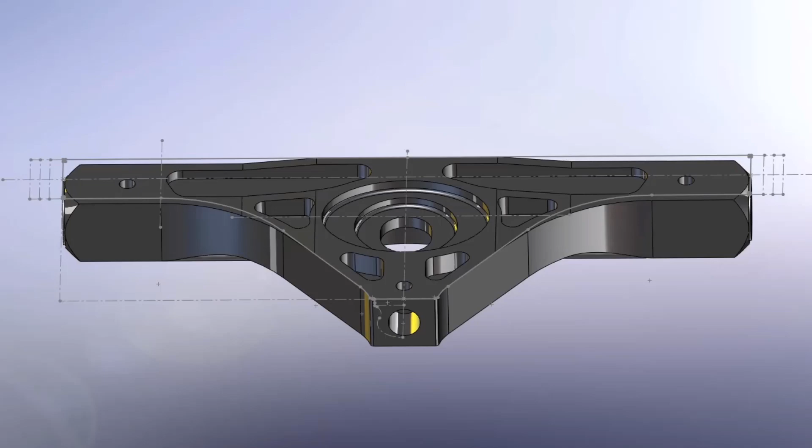Going to be going over today how to utilize the machining extension inside of Fusion 360 to program parts faster, to get rid of things like quality control issues, and overall, hopefully just make sure you guys can end up making more money. Cool, so let's go ahead and jump right into Fusion 360.

So out of the get-go, as you can see here, I have my part set up. This was one I more recently worked with a customer on. It's a weldment. It's a link to like an excavator arm or a trash arm or things like that. And one of the things the customer wanted to do was kind of use one work offset to control everything, but they wanted to be able to actually go in and find both ends of this part on its own corresponding work offset for machining purposes.

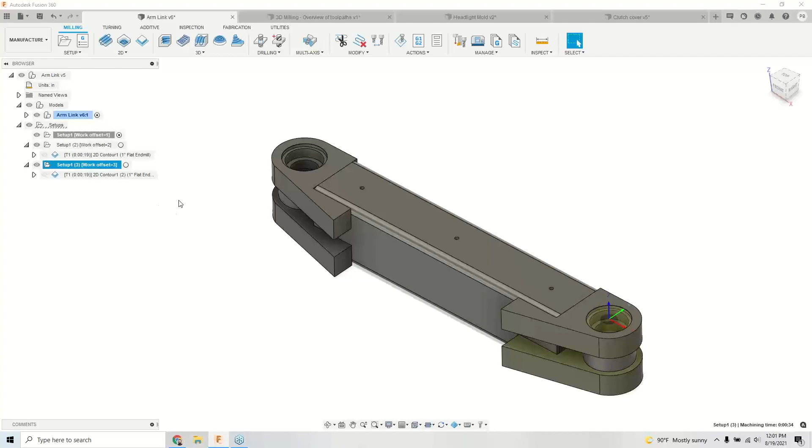And then at the end of that, they want to be able to actually probe their parts, make their measurements, and adjust tool wear on the fly. So as you can see from the get-go, for those of you that have used Fusion, I've already created my couple of work offsets. I've also incorporated in here a contour for that cleanup pass. And inside both of those contours, I need to move a menu here.

I actually created a tool path using wear compensation type. This is the key element here where I can actually go in, use the controller wear, which is where my probe is going to go in and actually push those coordinates. So right out of the get-go, in my first operation, I would like to create a couple of probing cycles to be able to actually probe the inside of those bores.

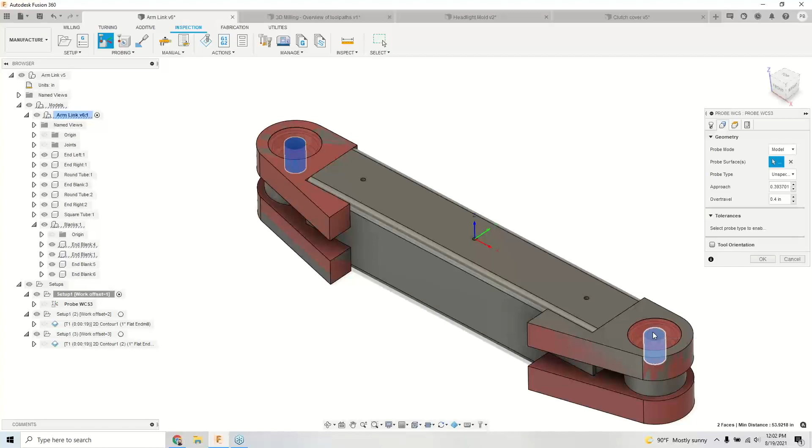So as you're seeing me do, I have these nice blanks cut that would be part of my weldment. Maybe they're water jet, maybe they're laser cut, maybe they're just flame cut. But I want to go in and probe the center of one of those using my probing tool. In this case, give me a quick second to grab my probe. So all I'm doing here is a standard WCS. However, what I want to do is actually output my offset to work offset 2, which will actually be my G55. And that G55 corresponds over here on the left to my next work offset.

So with that being said, I can actually control things. So let's say this was welded together wrong. If it's out of position, or if it's the wrong size from square one, let's just stop the machine and notify what's going on. So this is a process that you'll find yourself doing in the first setup. And the concept here is we're going to use our G54 to set the distance for our probe, and then we're going to push the results for the probe out to G55.

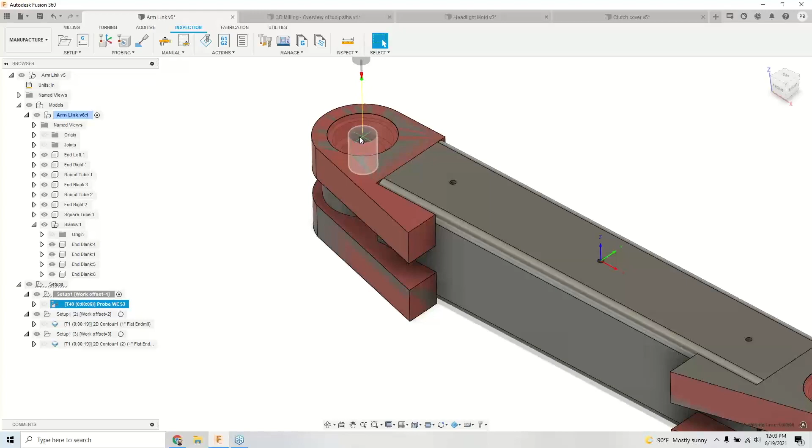I can duplicate this and do this for the other end, but I'm going to go ahead and now rotate down into my next setup. So the advanced probing side of the machining extension as a whole is going to actually include what's called probe geometry versus probe WCS. Probe WCS is in the base package, but probe geometry is where we actually go in and start to create our measurements. So by saying probe geometry, you're going to see this is going to feel very familiar, as if it is that other tool path at the end of the day.

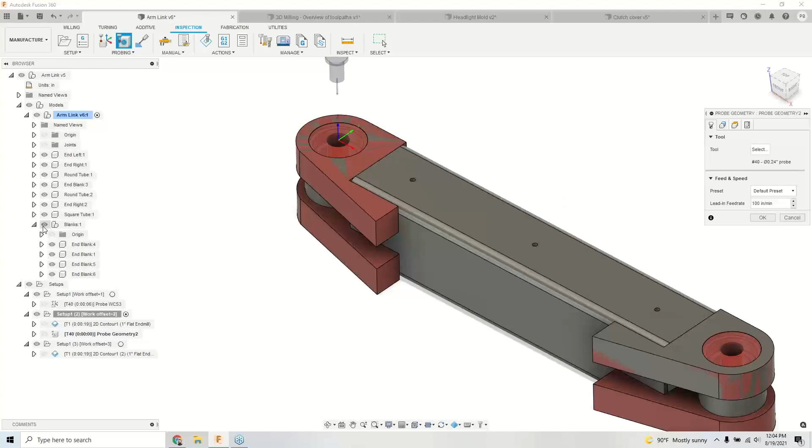So let's say we've already roughed out our pocket and everything. I need to go in and measure where my bearing race is going to fit. And I want to be able to measure that and maintain a tolerance. So let's say my press fit tolerance is going to be plus or minus 5/10. I can go ahead and plug that dimension in here. And with that information, every time it goes in and probes, I may want to say if it's the wrong size, I can go ahead and stop completely. Maybe that tool breaks, or I want to update tool wear based on that actual 2D contour.

So now you can see it actually pulled my tool through, and I can give this a minimum threshold. So we can get really, really precise here, where every 2.5 it's going to update the tool wear, but not until that threshold is met. And you can change your error correction. Maybe it's 100%, maybe it's 50%. This is how we're going to start to automate our process at the end of the day with our probing cycles. So now when we start to run this part, I need to move my menu again here real quick.

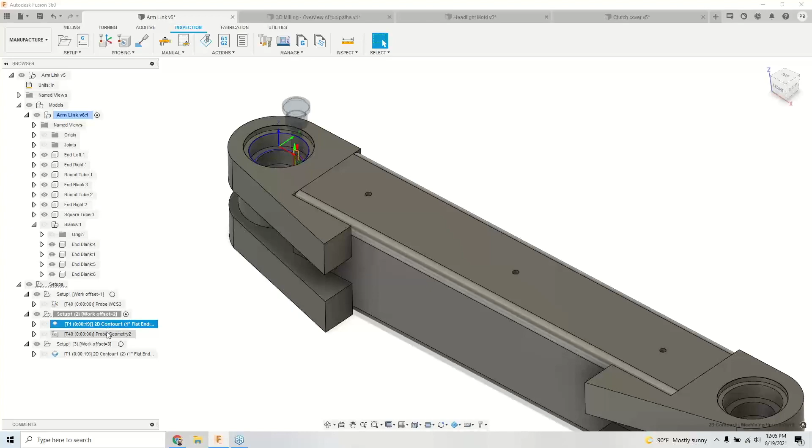I'm gonna go in, I'm gonna pull for my G54, and I'm gonna probe to the center of my actual drilled hole in that flame cut hole. We can measure that hole. We could set our G55, then come back in my G55, rough my part, cut my actual features. Lastly, let's probe those features. And with that information, we're going to plug that back into the controller automatically.

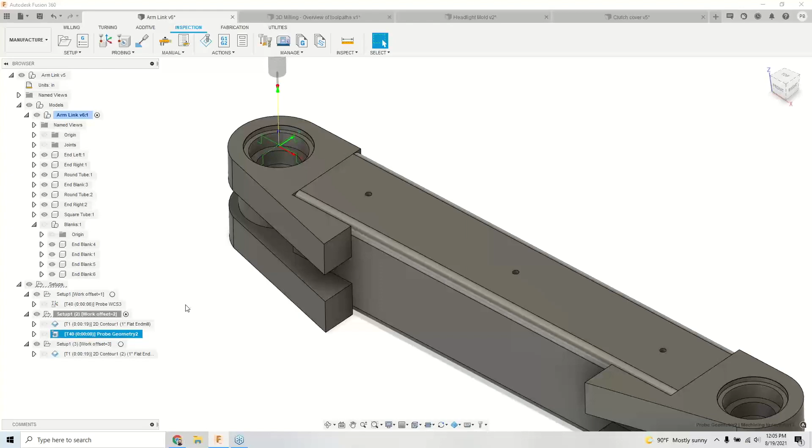So if I had to run 20 of these, I don't need to measure each one. I may not even need to do a go, no go certification, a check of this. I would still always measure the first and the last, but that way we can just concentrate on getting parts through the machine and simplifying the process on who could be loading parts, who's operating that machine.

Maybe you're a guy like me that likes to program and operate. This way I can run 20 parts. The machine is trusted to do what the machine is meant to do and make its own corrections on the fly. So let's go ahead and move on to another probing strategy that's a little more advanced.

If you're somebody like myself, you may have to deal with a setup like this from time to time. This is bolted down to the table. I may have a nice clean machine surface here. The issue with that being is how long could it take to dial indicate something in like this? Some of you that are more advanced programmers and machinists, maybe a couple of minutes.

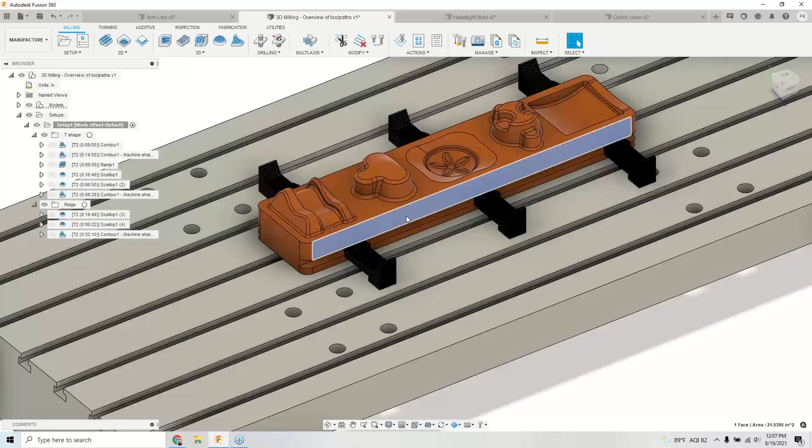Maybe this was a mold that's been ran for 10,000 hours. It's warped, it's twisted. Now trying to tram this edge in or find somewhere to pull my work offset from is getting next to impossible. Well, again, in that inspection tab, you have what's called part alignment. Part alignment is a great tool to be able to go out there and base your measurements in a 3-axis, 4-axis, or 5-axis environment. So let's just say 3-axis.

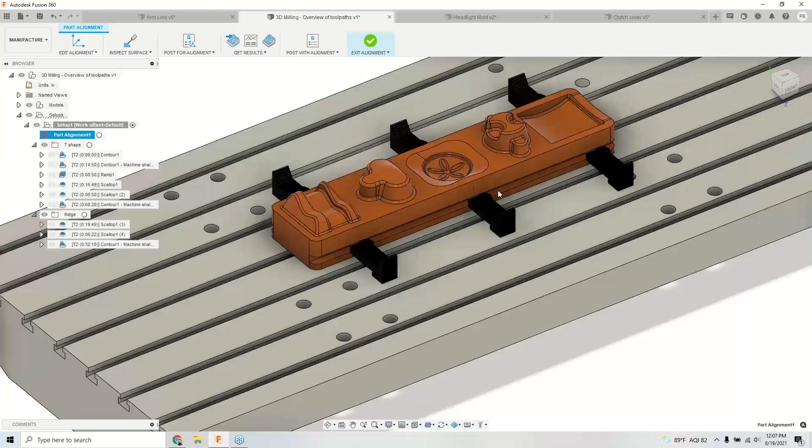And now I can go back and probe just about anything and everything I want based on this part. I can even actually come up here and pull things like flats. I can pull the top of this actual egg shape here. And the more points you pull allows Fusion to actually come through here and average these points. And with the average of those points, it's going to allow me to post my G-code based on alignment.

So the nice thing here is once you go through and you probe all of your features, you actually go out and post for alignment. That will run the probing cycle and bring the info back. Next thing around is we're going to post with alignment, which means if this part was twisted 2 degrees or my entire part's off 60 thou in not just one axis but all 3 axes, it will actually manipulate the G-code as we move on down my tool paths.

So this is kind of a neat feature that I found when you're going in and dealing with weird shaped parts, you're doing revisions, you're doing rework. Take a part like this out, you run it through your CMM, bring it back from the CMM, and it's wrong. Just getting it back in the machine could be a problem. So this is where we have that luxury to always bring something back, find it where it is on the table, and then run everything based on where it's located.

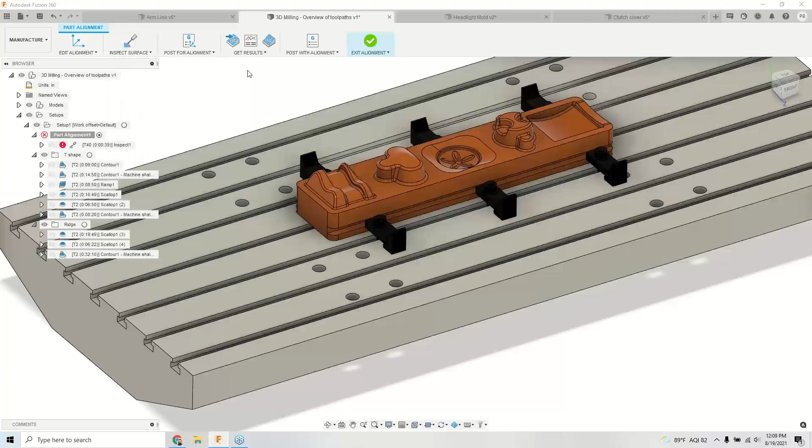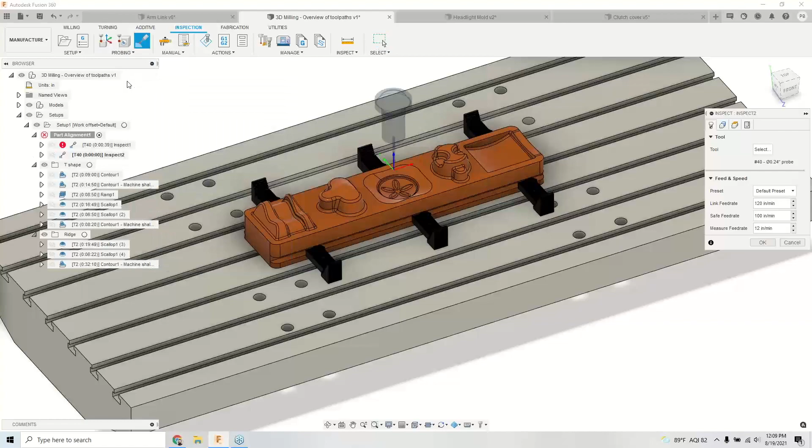Moving on from here, we're going to go ahead and finish this actual alignment. We're going to exit this, and we're going to start to dive into the last and final kind of advanced probing feature. That in here is going to be your actual inspect surface. The inspect surface, you're actually going to notice it looks very familiar from when I just did that part alignment. The same rules apply where I pull as many points on my part as possible.

And this is going to utilize that probe very similar to how a CMM would work. You can set your points of data, you can actually set your upper and lower thresholds, and you can post your data, bringing it back from the machine controller again. So if you take that idea that before we machine this all, we think it's good, we take it to quality assurance, and they come back and say you're missing something.

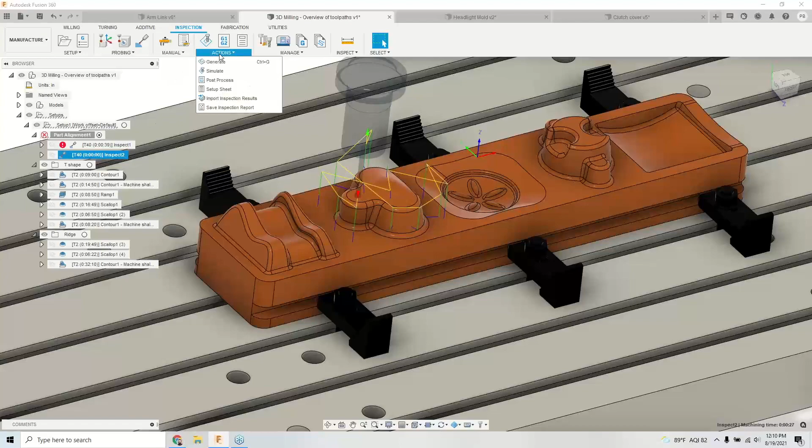Well, I wasted all that setup time taking it out of the machine, putting it back in the machine, even time that I had to wait on quality assurance, where I could actually go in and do an inspect surface, pull all of my points of data, and then you have the ability to go out there and import those results back in to show you, are you within tolerance of that surface?

Is your part in spec? Is it out of spec? Did I overcut? Did I undercut? Am I missing a feature altogether? Maybe I forgot to do a finish after a pre-finish on my part.

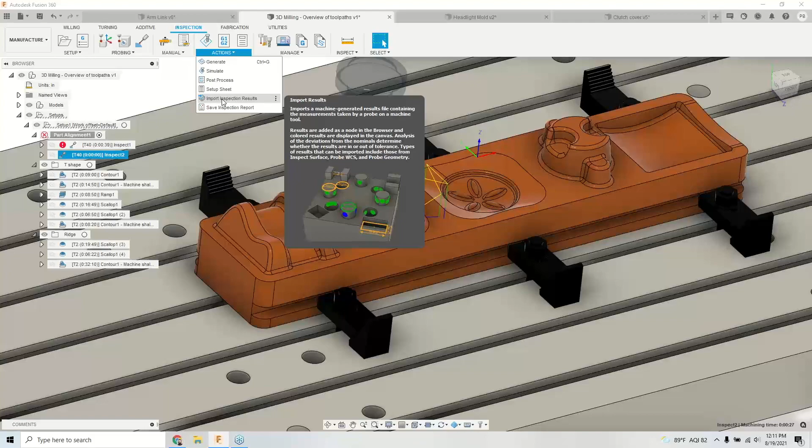I've also seen a lot of customers utilize something as simple as this, where they don't have a CMM, but they have a customer that wants to see a first article inspection. Well, why not use the probe you paid for on your machine to generate those results for you in the long run? Again, a little easier than doing the old-fashioned way with the height gauge or the micro height and

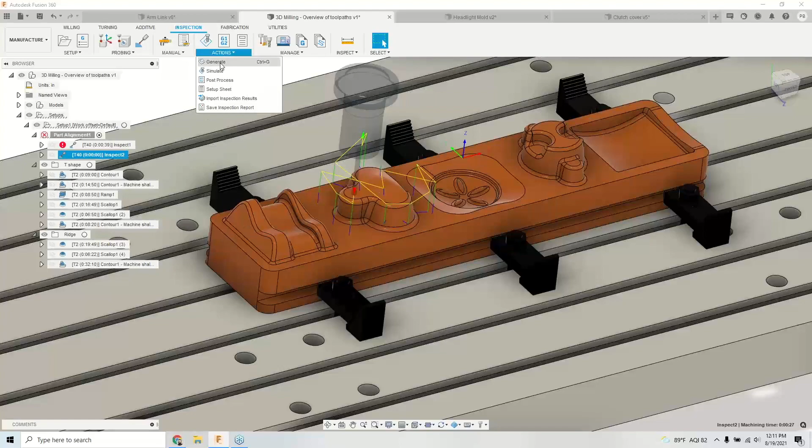filling out paperwork. We let Fusion go out and do that, and then you can actually save those inspection reports and email them back and forth to your customer, share them with a link. More of our 3D toolpaths that come in the machining extension.

Traditionally, if any of you are mold makers, you make tool, die, you find yourself even doing plaques and things of that nature that work with shapes that are very organic. By organic, I mean they're just not simple square and simple fillets. They're actually very involved 3D profiles that are going to require 3D surfacing.

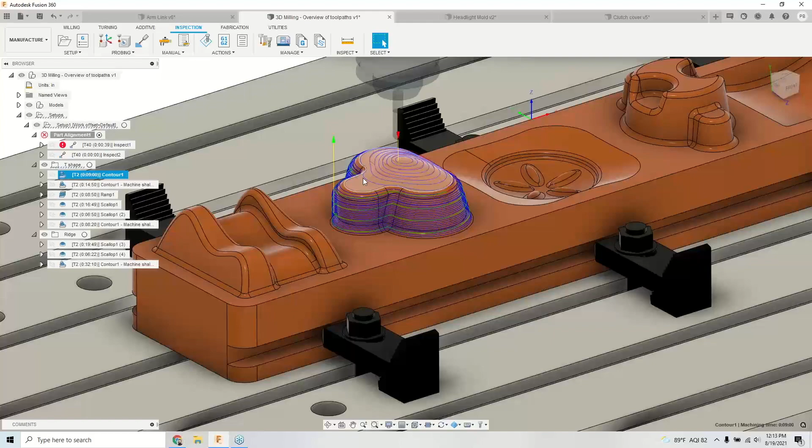So to most of you out there without the machining extension, you've probably been taking approaches like 3D contour. I'm a huge fan of 3D contour. I've been using this toolpath for a ton of time. That being said, the problem with it is when you get into the shallow areas. So you get like me, you start to adjust that toolpath, you start to turn on things like machine shallow areas. However, I get nasty cusps across my part in the extreme shallow areas.

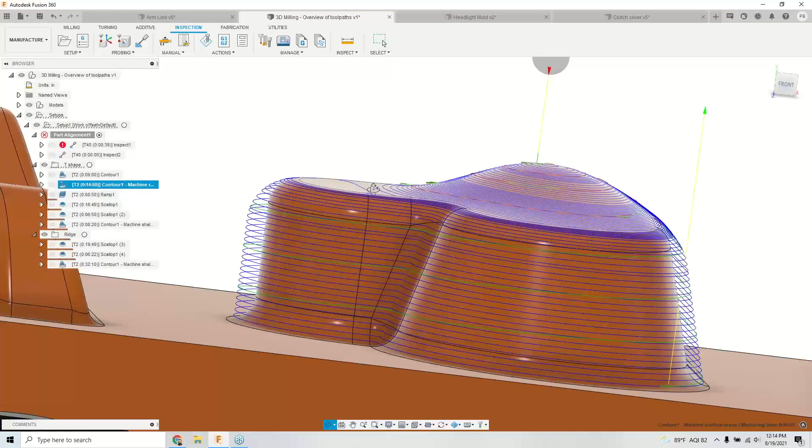So that usually leads me on to another toolpath that we can start to look at, things like a scallop. Does a scallop give me full coverage? It does. It's a great toolpath. But now in my steep areas, I'm probably wasting machining time. So yes, it's an awesome strategy, but there's still drawbacks of it when you get into those steeper areas.

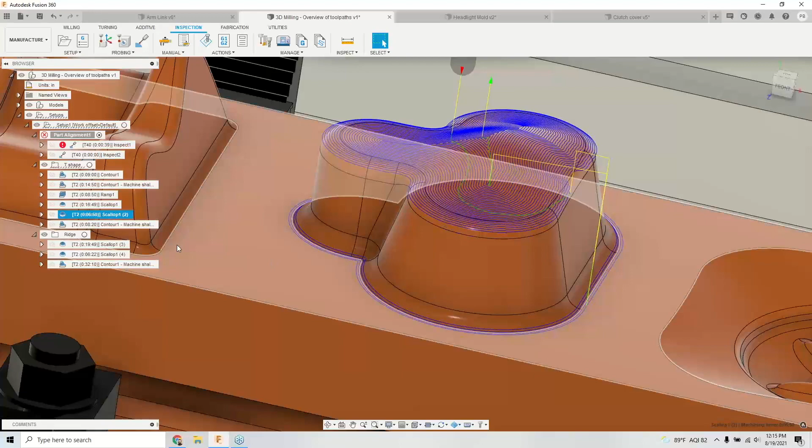So what I used to traditionally do is I actually used to split these toolpaths up where I can scallop one area, but the bad news is if you're trying to program this quick, I may now need to split this toolpath into two separate toolpaths. Because if I try to machine down here at the same time I'm machining up here, I'm going to plunge into my part. I'm going to cause surface defects and things of that nature. And again, I come back with that contour forcing just the verticals.

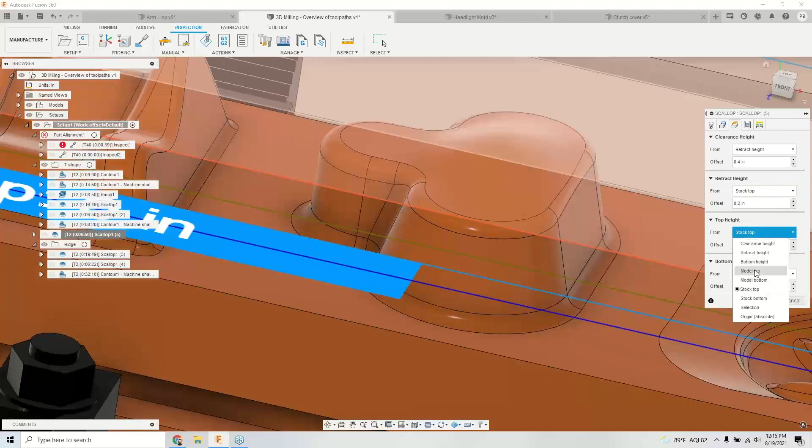So to fix this, this is a traditional approach. I would actually take this toolpath and duplicate it. And then I would need to reorder my toolpaths. This should feel familiar. And then I need to edit one to say I need to actually start from a selected point. And maybe I start from this point and work below there. So I just get my lower versus my upper.

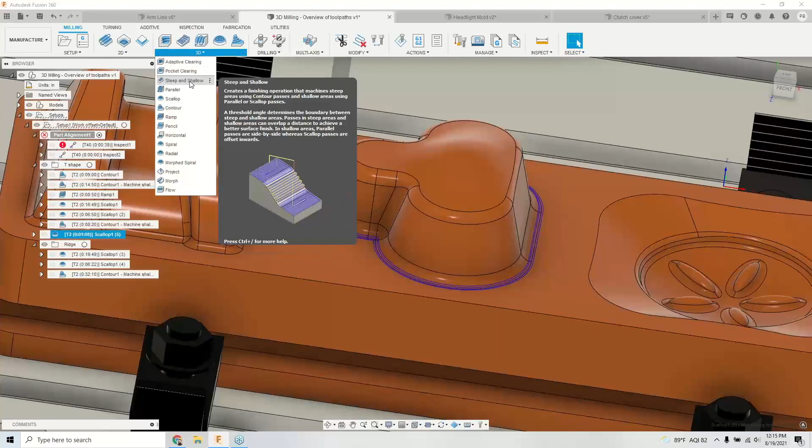And again, now you see I'm starting to program 3 different toolpaths to achieve what the steep and shallow toolpath kind of rolls everything up into one. So this is an added toolpath that you get. This actually comes out of PowerMill at the end of the day, where I can say steep and shallow with a tool like that, and we could go through and set this up.

So this toolpath will look a little more complex than my scallop and my 3D contour, but it's just as simple at the end of the day, where I can do my 30 thou step down, and then I want to do a 15 thou step over. And then the neat thing is at a threshold of 30 degrees, we change those actual strategies.

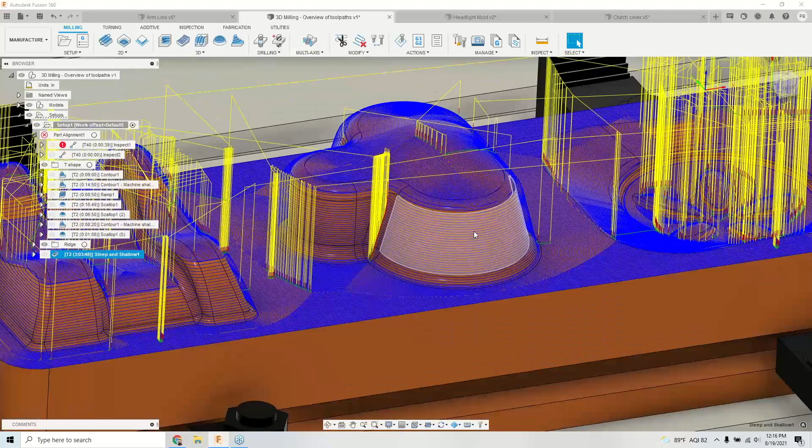So if I go ahead and calculate this, we'll actually see this information start to populate and come through. And while that's loading, let me go ahead and reorder a few other things so we can keep my files nice and neat. But we're actually going to see this strategy is going to do everything in one. And it's also going to work from a top-down type of profile, which is going to make life on everybody much easier. I tend to really call this toolpath my Swiss Army knife of toolpaths. And in the great world of being a machinist, you can see I also made a mistake by not setting my boundaries.

However, as we start to look at the different parts, you can see we scallop the top, we transition into a different strategy for the steeps, and then we transition to another strategy down here in the shallows. So that being said, let's go back and make a quick edit here.

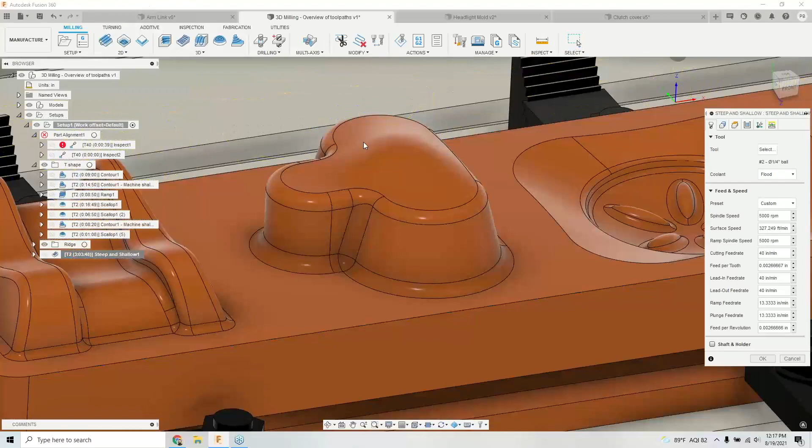Another feature of this toolpath that I really enjoy is the ability to actually say, ignore flat areas and things of that. So we're going to avoid the flat areas. I'm going to go ahead and let this recalculate. And we could take a look at this because you have things like the horizontal toolpath that's going to come through and machine everywhere flat on my model.

So instead of forcing boundaries or finding myself changing chains, saying, you know, avoid this surface, avoid that surface, Fusion quickly will actually identify those areas and populate them accordingly. So things like the top of my model over here is flat, this area here, this entire area is flat. We avoided all those areas.

So I'm going to go ahead and edit this one time, and we're just going to chop this down to a selected boundary. And we're going to go ahead and give that some contact point boundaries. So again, when we do a side-by-side comparison of one to the other,

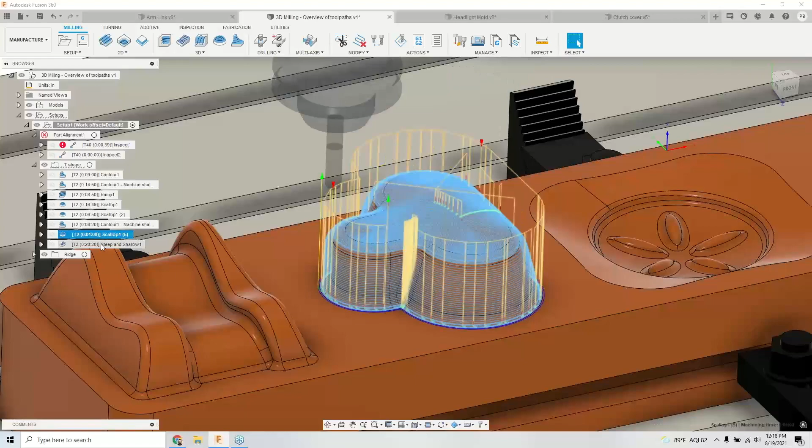normally we would do upper scallop, switch to a contour, switch back to another scallop strategy, where when we're using things like the steep and shallow toolpath, we're getting that nice upper coverage, and then we're transitioning down our part and then changing strategies again. So it's up to you if you would want to make 3 different strategies on this part or do one strategy that covers 3 different areas in one go.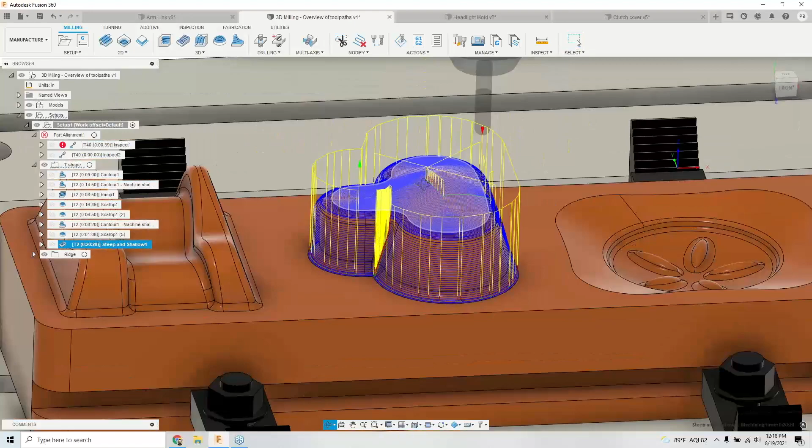Moving a little further on here, we're going to jump into this ridge feature over to the left to show the same kind of concept. So this part here in a scallop strategy works really well, but I'm getting a lot of weird vertical motions where I'm plunging, I'm moving up, moving down across that surface.

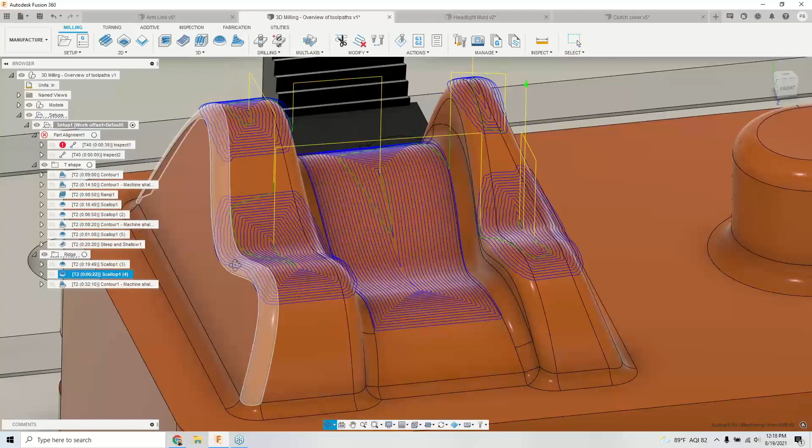Go in there, we kind of look at, what if I limit it to certain angles? This looks better. But then I find myself doing, again, a contour strategy to fill in those gaps when we transition from area to area. So we could do that steep and shallow strategy one more time. I'm just going to duplicate, copy and paste it, and then we'll just change our boundary.

But this is where we have the option to go in and actually change, are we doing a scallop versus a parallel? Because it makes more sense in those shallow areas. And it's going to be a feature by feature or a part by part kind of decision you make. The nice thing is again, we can work from the top down, avoid collisions, avoid burying tools, causing those little burrs and issues.

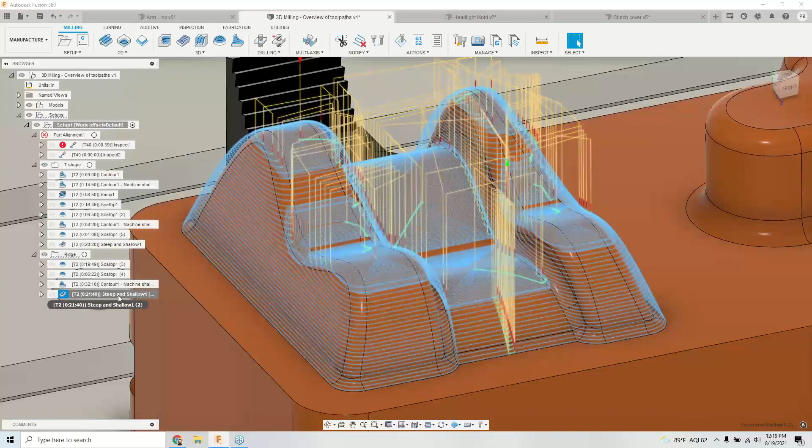We'll go back now and actually swap that out. So it takes nothing more than going to your passes tab. Instead of a scallop, we could say parallel, and we can actually go ahead and add a fixed direction if you would like. This will only specify one direction, or we can allow Fusion to make those choices for us.

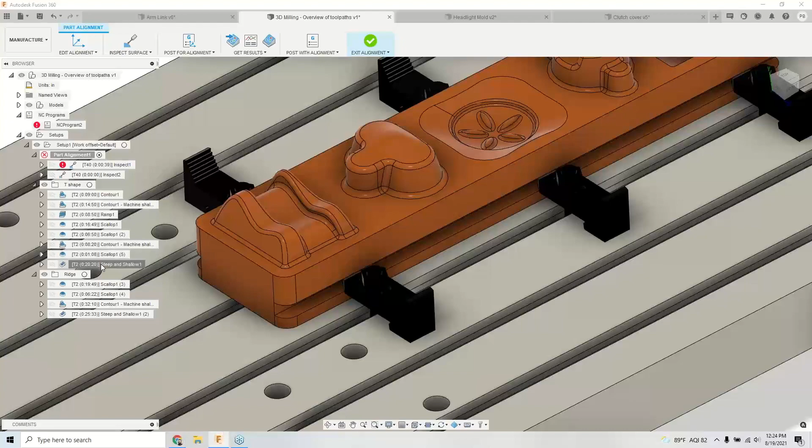Moving a little further along from here, we've gone over that steep and shallow strategy from a 3-axis standpoint to be able to utilize that on nothing more than a 3-axis machine. Diving into a little bit more fun with this toolpath comes in a lot of different options in it. So for example, right out the get-go, I like to use the simulation to show this, but we can actually look at our toolpath, and something as simple as all these little dots and all these little points of reference.

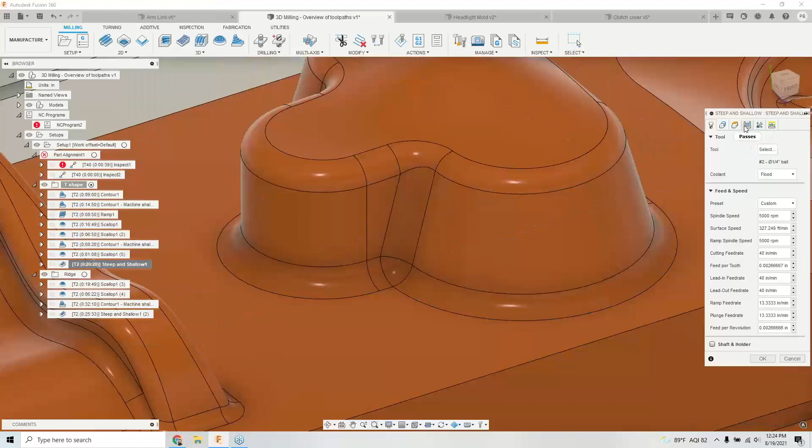Anybody that's been doing 3D machining has been using things like smoothing as well as your tolerance to help fix this. You're still going to get it, or your tolerance is just going to get so large that it's almost frustrating on your part, where the actual steep and shallow toolpath uses a couple different strategies from fit arcs to evenly spaced points based on what you're doing.

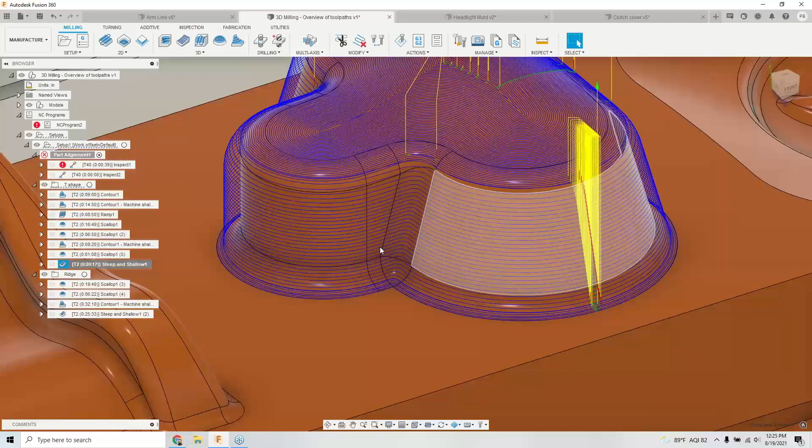I really love the fit arcs over the traditional smoothing, where you just give it a tolerance and hope for the best, because it's going to look at very similar curves and reduce the amount of points based on that curve. So let's go ahead and go back and look at our simulation. As you can see, other than my lead-ins, lead-outs here, all these very large sweeping arcs have had a dramatic reduction in points.

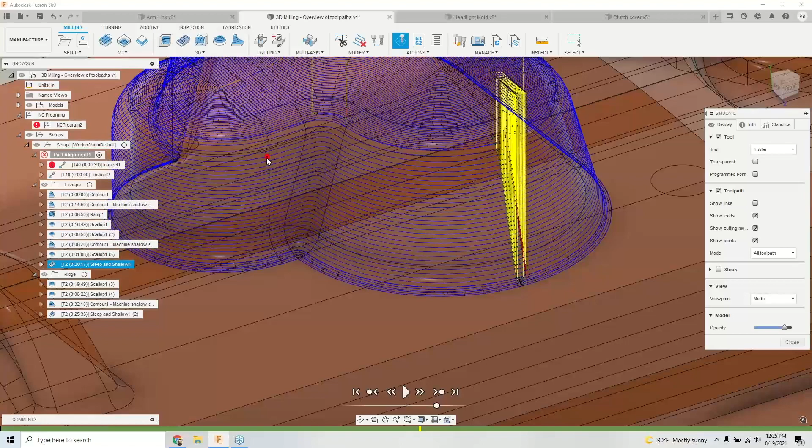And as some of you may not know, those points are based off an axis of change. So the less points you can get, the smoother your part tends to get, and a lot easier on your machine to run. Again, this is kind of one of my favorite toolpaths at the end of the day. I feel that it's absolutely worth it inside of Fusion 360, because you could come back and you could say

something like, instead of smoothing fit arcs, we could do evenly spaced points. Evenly spaced points will actually just give you that kind of a traditional approach, not the same as your tolerance where you allow a deviation. We can actually say from end to end along that toolpath, what is our maximum spacing? Do we want to increase? Do we want to decrease that? Do we want 1,000,000 points on something so simple? Or do we want 10 points?

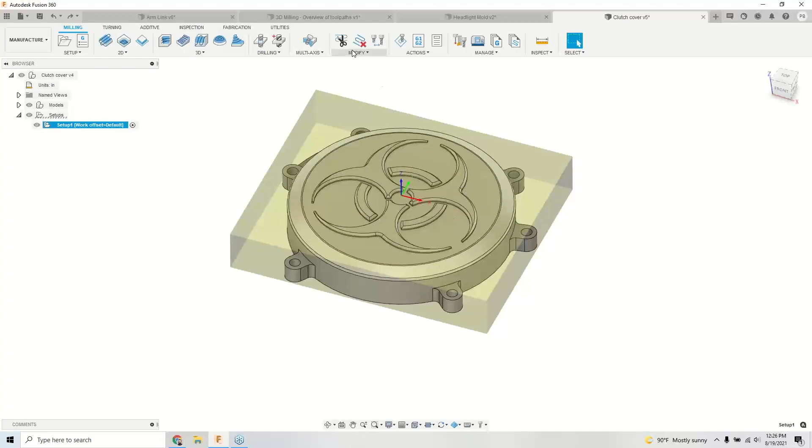This is something that, again, I find myself using constantly when it comes to doing 3D machining, mold making, even using it on a simpler part, kind of like this clutch cover. I have a few customers that use steep and shallow to be able to do vertical walls and flats, and then this taper here all in one shot, just because they treat that scallop toolpath as a horizontal. So we're going to actually circle back to this part here in a little bit, but I'm going to transition away from the steep and shallow.

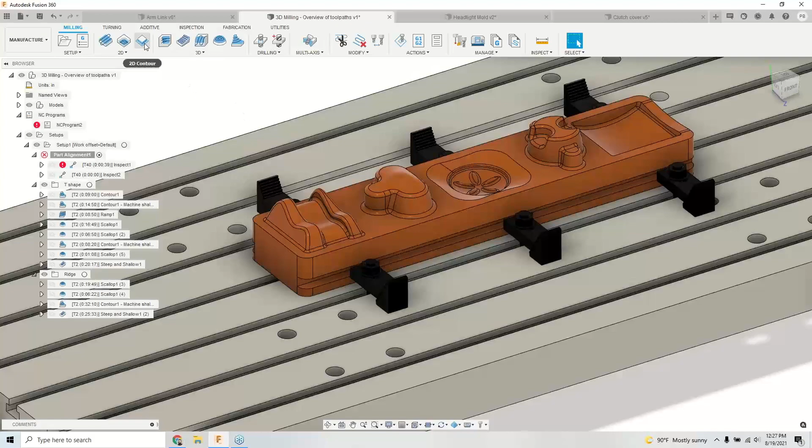Oh, my fault there. I hit the exit button. We're going to transition into a few other tools that I don't think I could live without in machining after having them. And it can be something as simple as a 2D contour on your part. So let's say I just want to cut around the outside of my part, and I want to go to model bottom. I know some of you out there are probably going to critique my terrible choice in tools here. This is just demonstrating the possibilities.

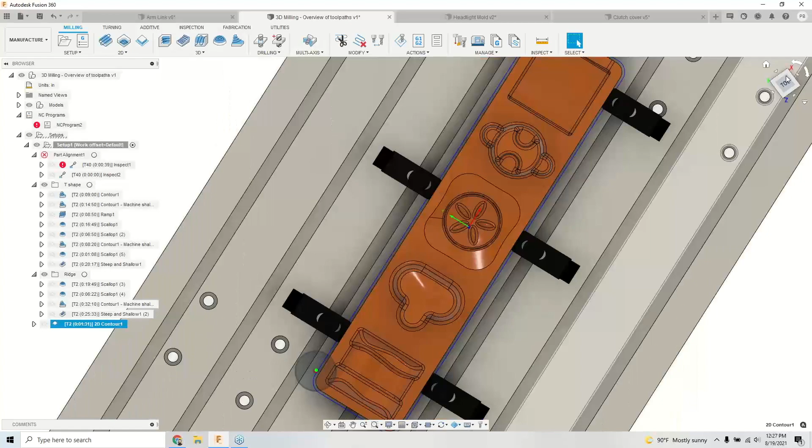So just like that, I'm hitting my clamps. I feel like tie downs, clamps, jigs, fixtures are a huge part of everybody's life. Well, how do I avoid those? Again, traditional approach, I can go back to my setup. I can edit my setup. I can add those fixtures in there, kind of play with this more and more, or I can do what I prefer, and that is use trim toolpath. Well, trim toolpath allows me to quickly define boundaries based on areas that I don't want to machine.

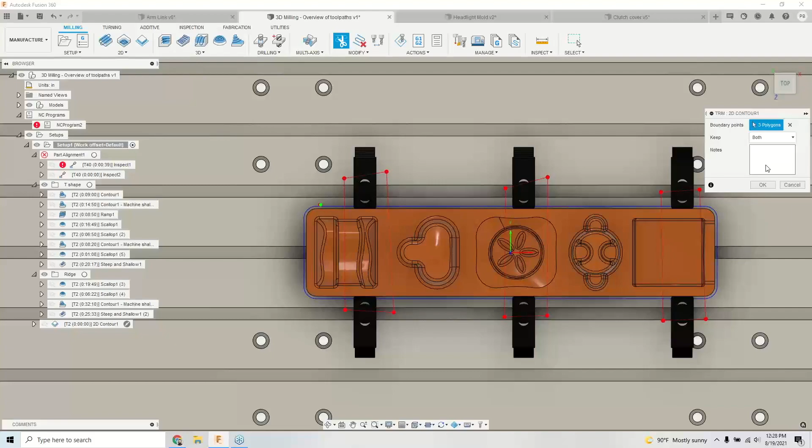So in this case, I can actually get away with a rough estimate of where my clamps are, because we all know those clamps aren't going to be exact to where they're modeled right now. But I can actually add in a few boundaries here, and then I can use the outside or inside strategy, or both strategy. I love the both strategy here, because even though we machine around the outside of this part, I need to come back and still machine those little segments.

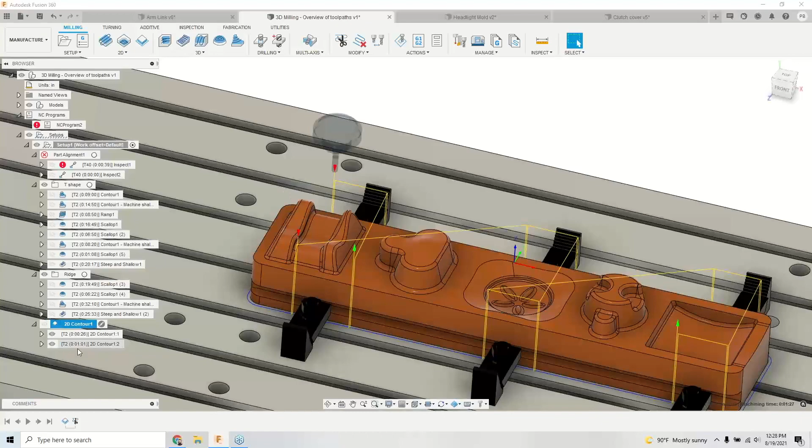So just with that, we could actually skip over each clamp around my part, and maybe my clamp isn't exactly there, right? I can always go back and edit my trim toolpath, and I can drag and drop those points to wherever I want them. I can add more points. Let's say for some reason the operator actually put this clamp much more this direction. So we're going to change this on the fly, and it's going to automatically update my toolpaths.

So again, we took a standard 2D contour around my part. We split it into an outside of the boundary area and an inside the boundary area, because we do that first op, then we move our clamps, we come back and remachine those areas we skipped, all very quickly by dropping a couple of polygons. I remember back in the day when I used to have to go back to design, create boxes, come back here, select those boxes, and it was just a painful workflow that I had to live through until this toolpath actually came out and allowed me to start machining.

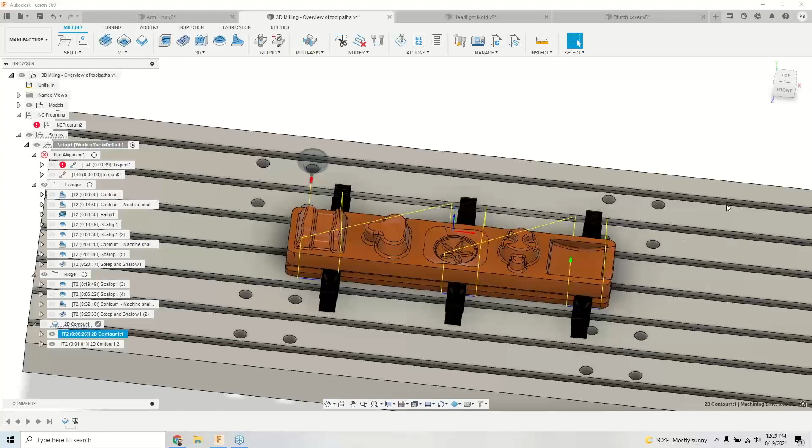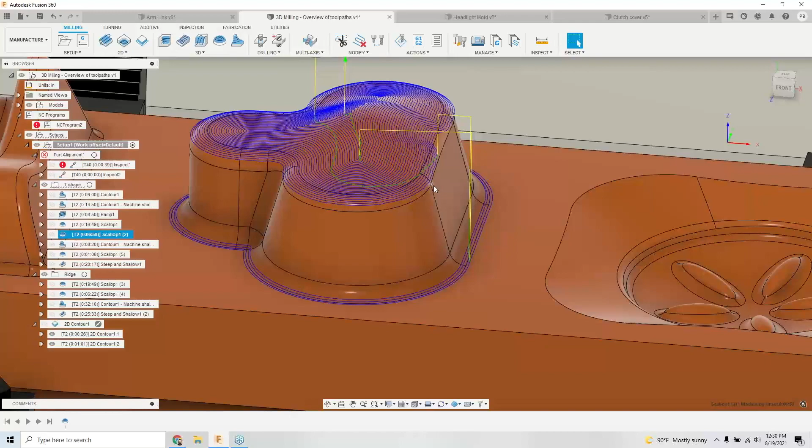So there's another side of this toolpath. So not only do you get the toolpath trimming, but you actually get the delete passes. So if we go back to the scallop toolpath, as most of you know, we could always set a bottom height higher or just below the profile that I'm working on, but I can also do what's called a delete passes. Well, what a delete passes will allow me to do is quickly come in and grab a section of toolpath and say, okay, and just like that, I can delete out whatever I want on that toolpath.

You can go back, you can edit this after you've done it. So you're starting to see a timeline almost like the design workspace, where maybe I don't want to do the passes, I just want to do certain segments. So let's say we only want to do a couple of little segments of this toolpath for some reason. So let me get zoomed in here and grab every little line segment we're getting.

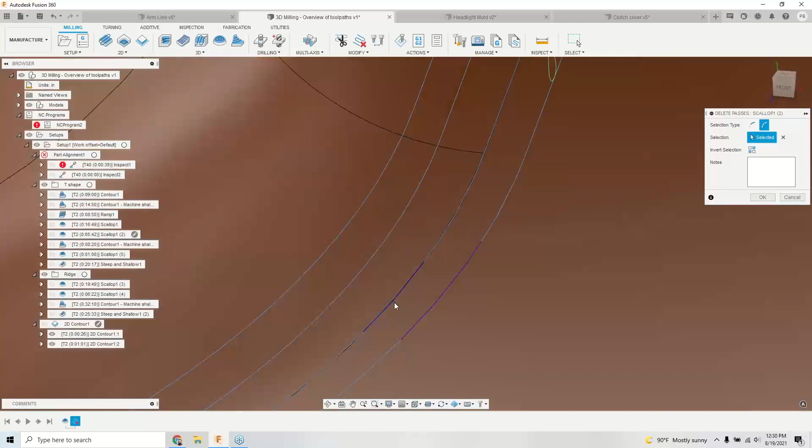You could do this with your lead in and lead outs. We can modify more and more of this toolpath as we need, but this allows you to go in and quickly pull out little sections, or if you get those weird little waterfall effects that happen on your part, you're able to go in quickly and change those.

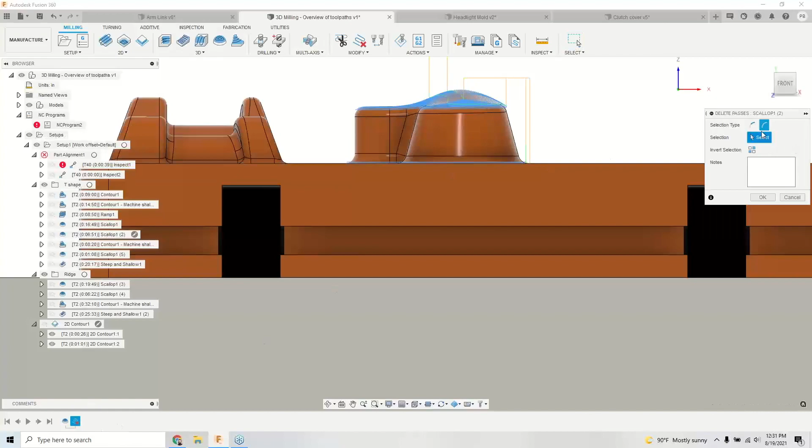You could do a few other things with this that is great at the end of the day. You could actually drop a window quickly and grab all those profiles and remove them. This works with deleting the segment of the actual chain or the chain itself when it comes to the toolpath. This is very handy when you're doing 3D surfacing. You could spend an hour modifying a toolpath to get rid of one little section, or you could do like I do, come in with the delete passes and actually remove that segment as we go.

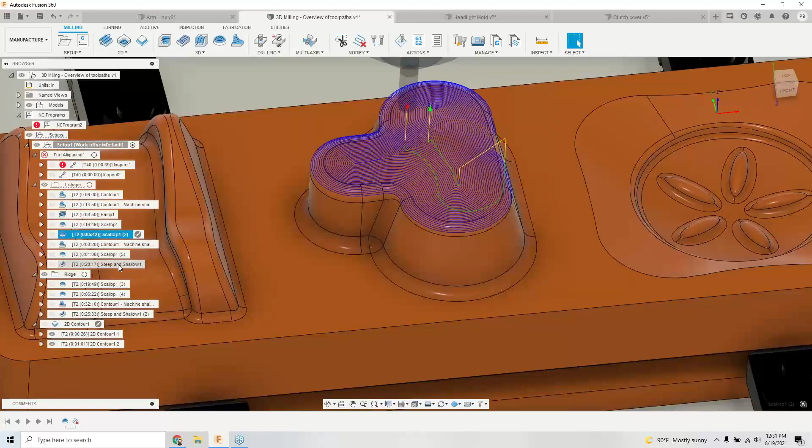A few more things that I love about the combination of these two is the fact that I could actually go in and I could do a trim toolpath here. I can pull a box based on that part, do things like both. So this doesn't just work in an XY plane, it works in a Z plane. So splitting something like that steep and shallow strategy, I start from the top of my part and I start to work down. Well, this is where the last option in this area comes in, where we can go in and we can modify and change our tool on the fly.

So I now took a toolpath, split it into two segments, which a lot of you may be chuckling right now that before I was telling you, let's get 3 into 1. And then I can change things like the tool length so that I can use a longer tool. Again, making programming easier, not having to rely on the math. We can do this with a few simple fields inside of Fusion.

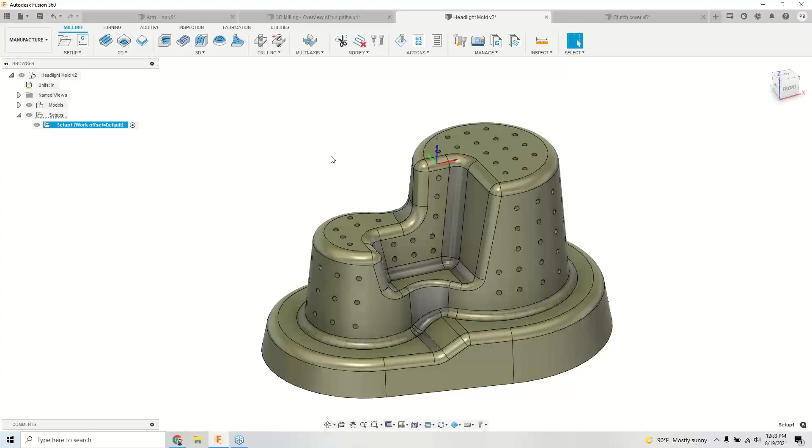I'm going to go on to my next part here. We're going to ramp up this a little bit more. So let's go and now look at a nice little headlight mold that we have here for a customer. So this is where I can't brag about the steep and shallow toolpath enough, because in an environment that requires 5-axis or even 4-axis, we utilize that same toolpath to be able to control 3, 4, and 5-axis machining. So let me pull in an end mill here. Let's just do a little section here.

So now we're going to take what would be normally a 3D toolpath and turn it into a 5-axis toolpath. So if I was only worried about this internal cavity here, I have that ability to do everything the same as before. Let's just say we're working with a 50 thou step down, 25 thou step over. And for those of you that don't know, the first time when you use this, calculate it as 3-axis, and then we'll come back and we'll add multi-axis to it. That way you don't spend a lot of time regenerating toolpaths to just make sure that you're hitting all your surfaces correct. So that's looking pretty good.

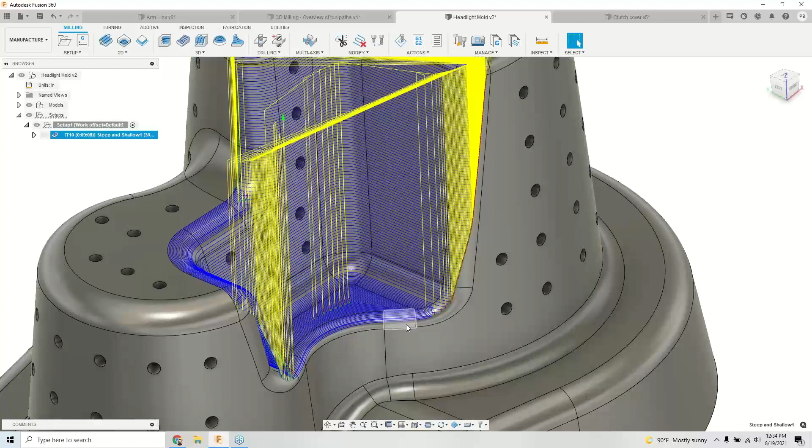I didn't turn on contact point boundary, which would explain why we're not going all the way to the bottom of those fillets, but that won't really affect what we're doing here. So let's go back and edit this. You're going to notice this is the only toolpath that has a multi-axis section. Well, this is where we transition from a vertical strategy, which is 3-axis, to being able to do full-on multi-axis.

But it gets easier than that. So we do have the ability to tell Fusion, I want to set my tool to a certain lean, lead. I want to go to, from, points, and curves. But we also have advanced collision avoidance built inside of this toolpath.

So if you're somebody new to 5-axis machining, I can go ahead and turn on collision avoidance automatic and simply say, okay. And what now is going to happen with this toolpath is we're going to go in and we're going to calculate. If any of you have used the multi-axis feature on 3D Contour, the same kind of system is happening here. However, it's going to be a much cleaner toolpath. Again, we're using multiple strategies combined together here to be able to do this. So we're going to go ahead and let that calculate, give it a sec. That's the automatic coming through.

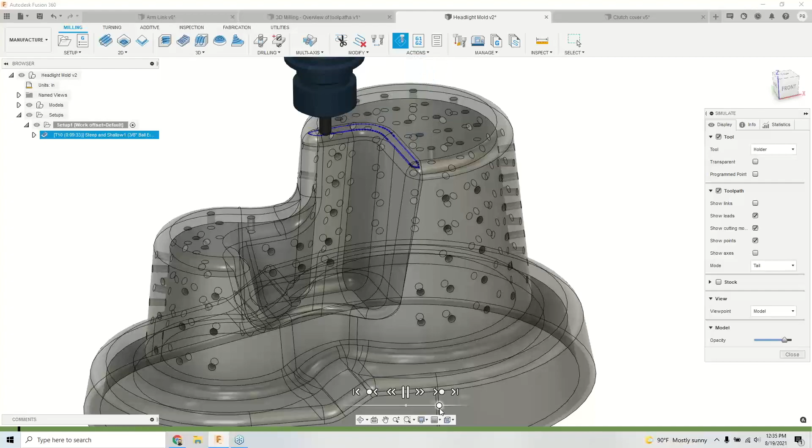And right out the get-go, you notice my tool is still vertical. But from a simulation standpoint, let's go ahead and turn that back to tail so we can see this, is if I hit play here, that toolpath starts vertical, but as we get down in our part, we're going to start to get toolpath lean. And now we're actually in that 5-axis environment, back and forth that surface, to be able to clean that all out. And as we get deeper and deeper, Fusion's actually recognizing that tool holder and checking for clearance all the way around that part.

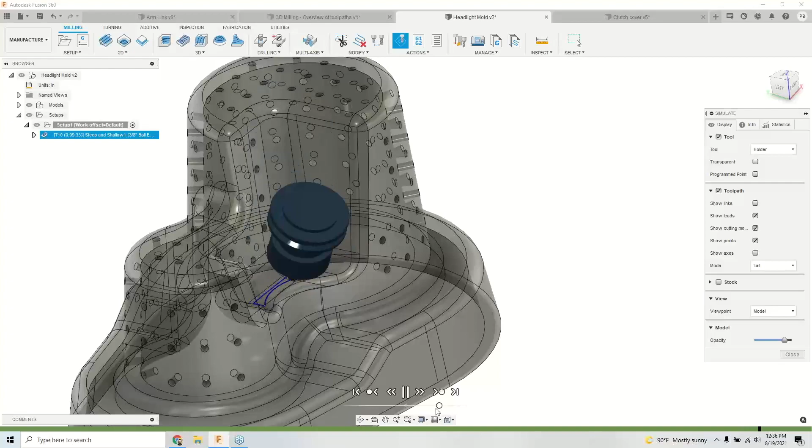So now we're utilizing the tool definition, we're utilizing automatic collision to very fast come in on what would be a weird or a strenuous internal pocket to clean that out, and not only clean out just those vertical areas, we actually were cleaning out that upper area. And as we get down to the bottom, you'll see we go back to that scallop strategy to clean up our floors and make life easy on everybody. So you can dive into this more and more.

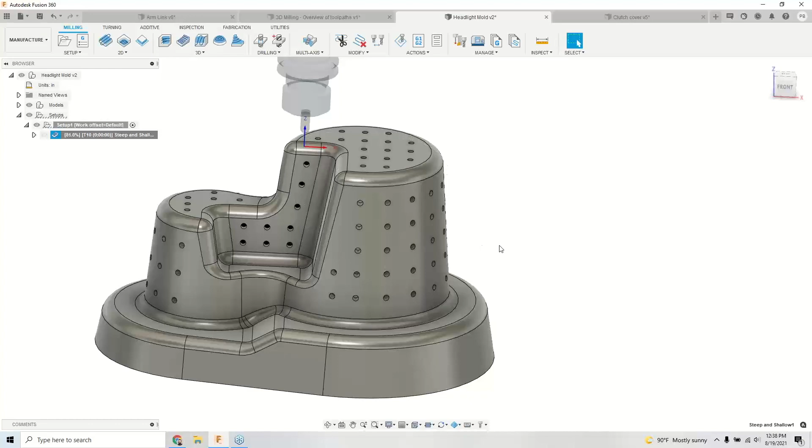So again, instead of using the actual steep areas or the shallow areas, we could do things like use that automatic tilt control to wrap around my part and machine different features or different surfaces or blend surfaces, and letting the software do what the software does best, think about it for us, making my life much easier at the end of the day. Anybody have any questions on any of this yet?

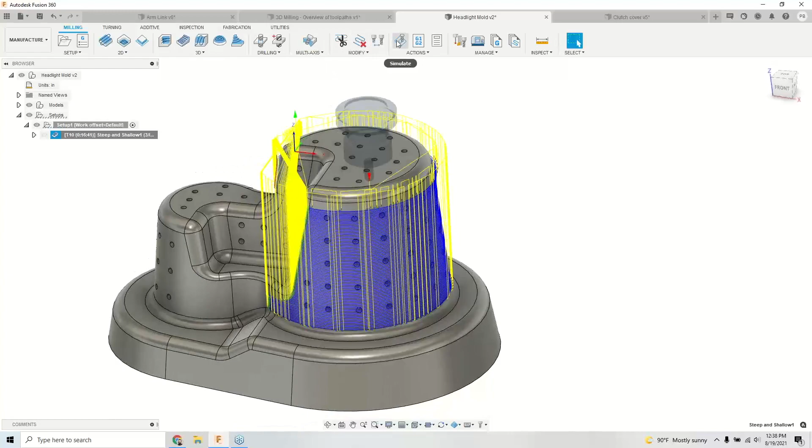So again, as you can see here, we could go ahead and simulate this. We get that vertical path back and forth, but then now we're starting to get our tool leaned out more and more as we work down our part. And again, as you can see, we may have got a little bit of funkiness in my toolpath up here at the top, right?

All those little line segments that are a waste of time or probably not touching anything, we now use a combination of delete passes, come in, I can grab those little segments and remove them directly from my toolpath and save a ton of machining time instead of trying to adjust top height, a bottom height, and all of that fun stuff that most of you have probably been doing for some time.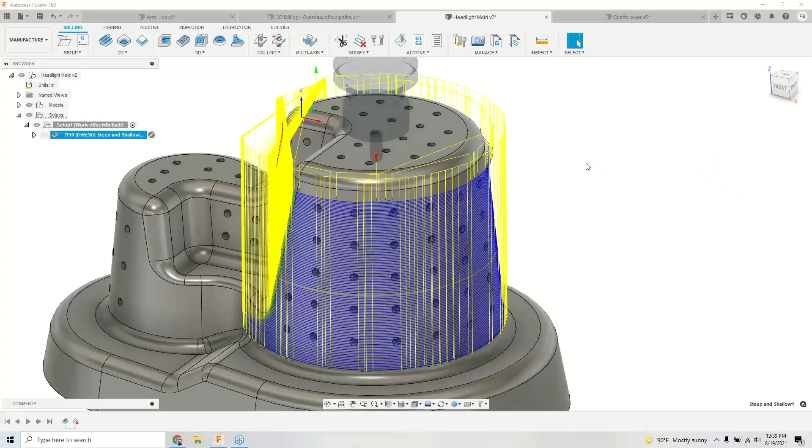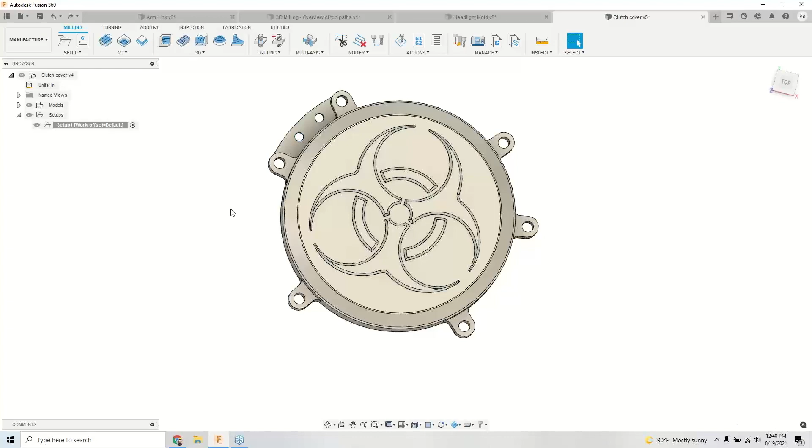Another extremely powerful feature of Fusion 360's machining extension is what's called hole recognition. For some of you looking at this part for all these vents, we're going to come back to these in a moment, but I like to start a little simpler than that on this clutch cover. So I know none of you have the print in front of you, but in short, I have two different sized holes. They're drilled, they're tapped, they're through holes, relatively simple.

I can actually go into my hole recognition, and very quickly, hole recognition just saw 0.2014, that's a quarter-20. So if I go to spot drill tap through, it automatically recognizes my quarter-20. And then my 0.257s, which would also normally be a 5/16-18, but maybe they're actually metric M7 by 1 or something of that nature. I have the ability to change these different things or even go back and just say, you know, maybe this is a reamed hole for a pin.

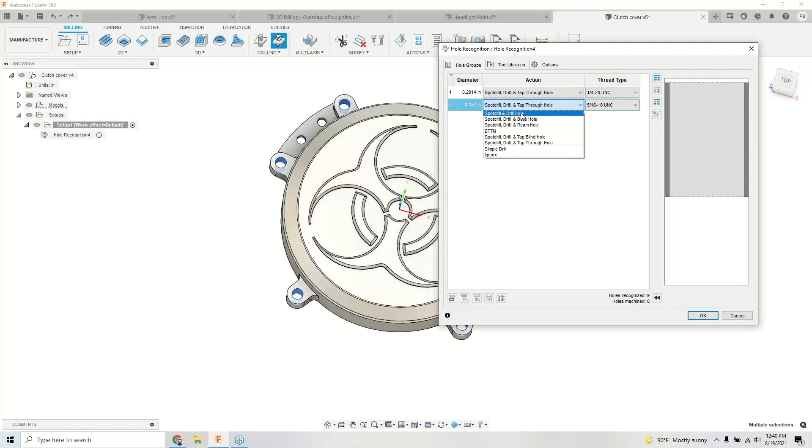Quickly, I identify my holes. I can hit OK. Fusion's going to go through and spit out my tool path. So one thing is that I don't have a reamer in my library. Had I had a reamer, this tool path wouldn't have an error. But in about 20 seconds, I created 6 tool paths with spot drilling, drilling, and tapping, all based in that tool path in a 3-axis environment.

So if you're somebody that's doing a lot of drilling and tapping at the end of the day, I would highly recommend having a feature like this. And if you're somebody out there doing 4th axis and 5th axis drilling and tapping on a part like this, it's one of those tool paths that I can't believe I ever used to live without. I can come in on a part in a 5-axis environment and say, well, it's only seeing my vertical holes. Okay, so let's go ahead and transition and say, first off, I don't want to limit to my setup plane anymore. And I can actually set angular limits to control this.

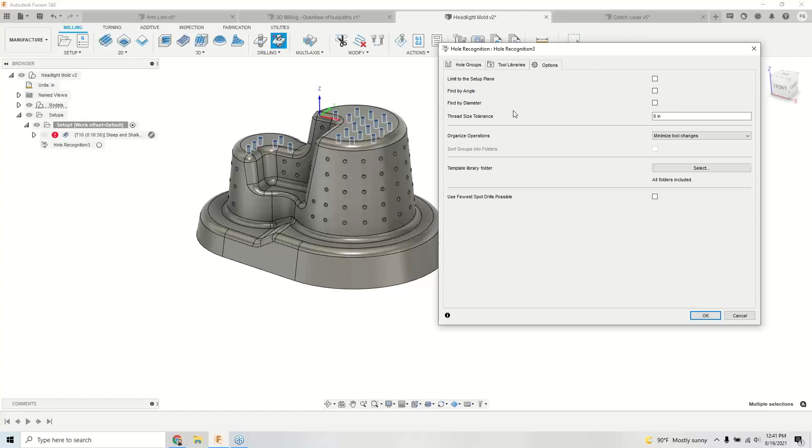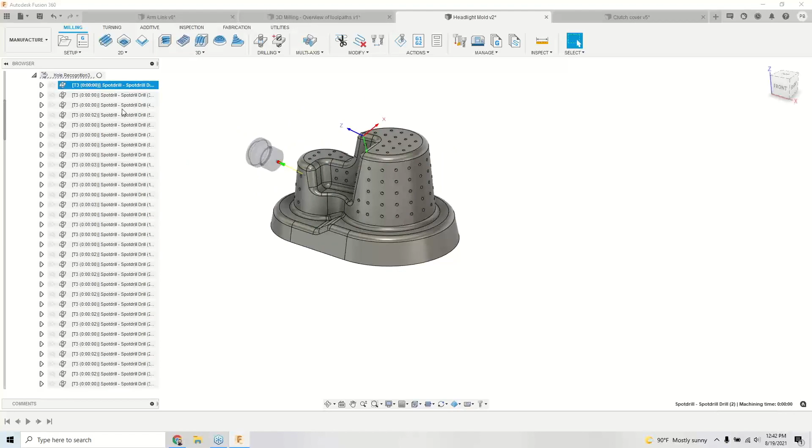But now, as you see, all these holes on this part have actually come through for my recognition. So I can go through and adjust all of my holes, or I can hit OK because I'm happy with those strategies. This is now going to take a few seconds because we're actually calculating, I think it's just under 100 holes here. I'm also streaming live video to the internet. As you can imagine, that takes some processing power. But it's going to spit out all of these holes in all of my drilling cycles, still within a very reasonable time frame.

So for some of those out there, this list is gigantic. So let me get down to the bottom. That is a total of 92 operations. So spot drills and drilling or simple drilling, whatever way you look at it, I did 90 plus holes in less than 60 seconds. And in a 5-axis world that some of you may be making a ton of work planes and trying to go hole to hole to hole, hole recognition will also utilize any templates that you've been creating in a hole template environment as well. I can't stress enough that if you're somebody that's just really trying to get parts out, the machining extension is going to speed up that workflow and make it better.

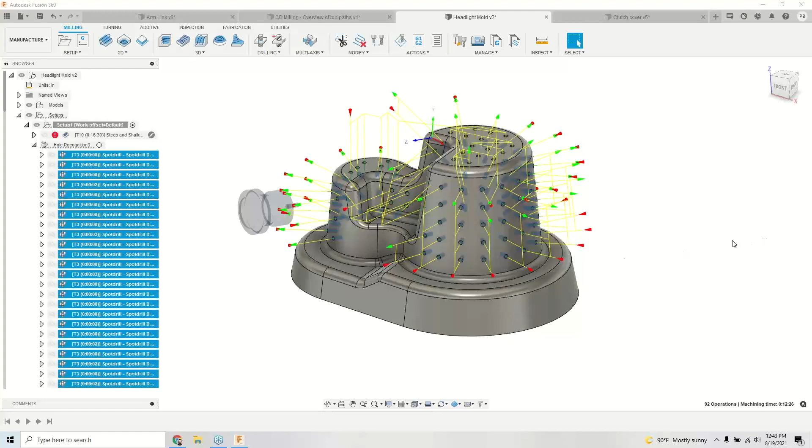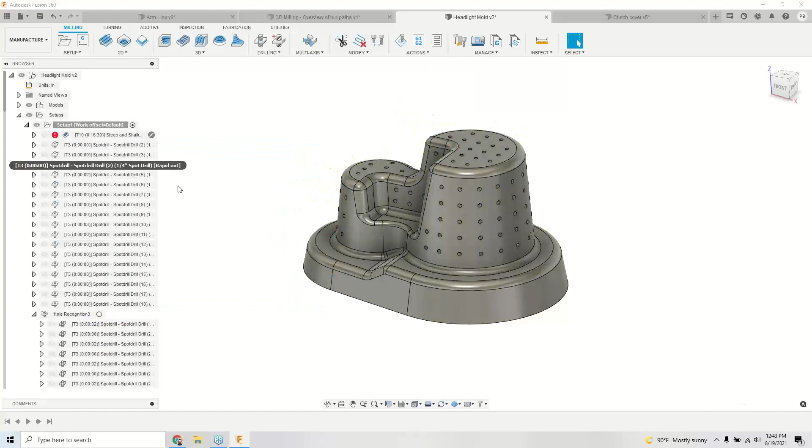Another thing to keep in mind is that if I had to go through and do this for each tool path, I'm going to find myself creating or utilizing tool orientation, picking that face. Nothing's to say that you can't go back and pick one of those tool paths and edit it even after the fact. Or you can take a big section of these and drag and drop them to different operations. Once they're created, they're fully manipulable, fully editable, and changeable.

For any of you that are actually interested in the extension, you have the ability to always go on and look at the machining extension and see what's in it. That's right, I forgot additional tool controls. We'll visit that one here. But I just wanted to circle through this list to, again, kind of give you all an idea of what's all in this list.

So we'll start from the bottom and work our way up. The things like the toolpath editing: the delete passes, the trimming of the toolpath, and the change tools without recalculating toolpaths. Those were all things that are great for manipulating your toolpath after it's been calculated. Again, I don't think I could live without those.

Moving up a little bit, that steep and shallow strategy actually also includes the ability to do 5-axis collision avoidance. That's built into that toolpath directly. You're getting all of this in one package.

The rotary strategy, I'm not actually going to touch on today. A lot of people think they need this because, oh, I have 4th-axis milling. Well, this is actually for non-geometrical shapes, and it gets a little funky. So Fusion by itself will do 4-axis work positionally. It's when we start to get into the fun of live rotary rotational work that we can use that rotary strategy.

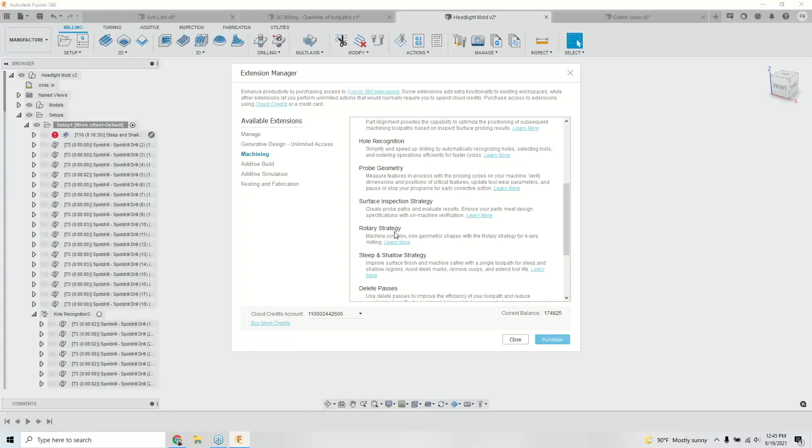So surface inspect, the probe geometry, the hole recognition and part alignment, the advanced probing package that comes in here is all that stuff that we started with at the beginning of this demonstration, from aligning your part to picking up your features, recutting profiles, all built into this package here.

And then lastly is that additional tool controls for tool orientation. This is one that, again, I don't know if I could live without. If they ever got rid of the machining extension, I don't know if I could still use Fusion at the end of the day. But for most of you out there that are using 2D toolpaths, say for bore, for example, or using the 3D with tool orientation, when I turn on tool orientation, you're going to notice mine looks a little different than normal.

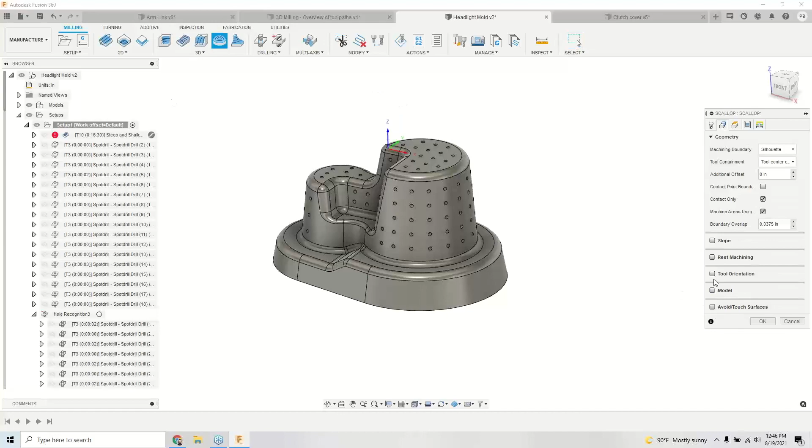In this case, I lied to you because 2D toolpaths don't actually do this. Let's go back to a 3D toolpath, so let's pull a scallop toolpath. When I turn on tool orientation inside of my 3D toolpaths, I get the ability to turn and tilt my tool based on what's going on. So if we wanted to very quickly say I want to do a selected boundary based on an area, and I want to do positional work, I actually want to use the edge of the tool, not the tip of the tool.

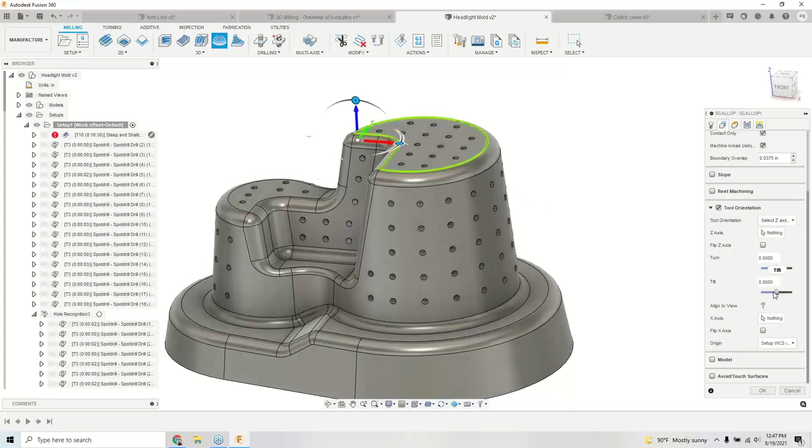I can tilt that tool angularly right here in real time. So if I wanted to say negative 15 degrees, I now have a 15-degree tilt without creating work planes, without trying to find geometry to select for machining that surface. So let's bump this down to 030 and let it calculate. So those additional controls will make your life a night and day difference.

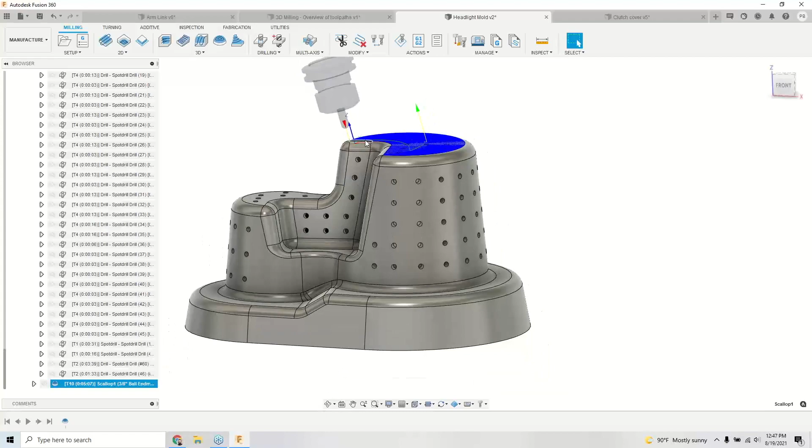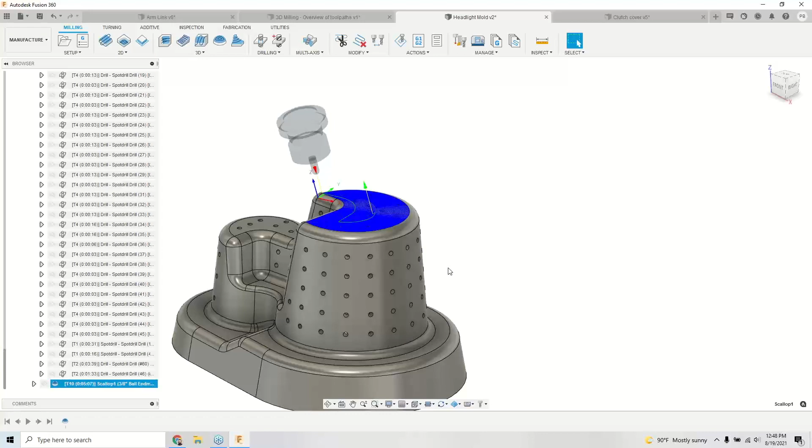And the additional controls also work in a 4-axis environment. But to go in fast, tilt the tool to get off the tip of the tool, or to find a feature or machine a feature at a weird angle, I don't have to create work planes. I don't have to create sketches. I have the ability to very fast go in and tilt and turn that tool to get it where I need it to work. And again, we can actually twist this now and get off very weird angles if I know what that angle is, or I'm quickly just trying to get a good toolpath out of Fusion 360.